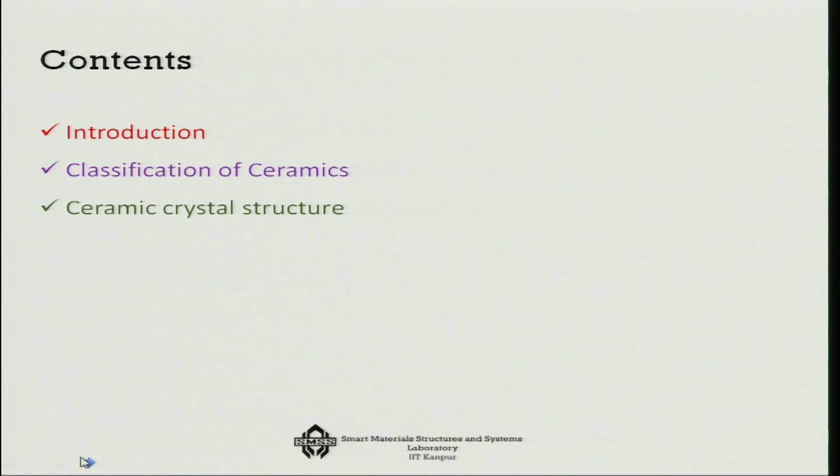Now the name ceramics, as I told you, this whole thing is very ancient in nature. The name itself has a very ancient root, because it is derived from a Greek term, keramikos, which means burned stuff. In earlier days, when we talked about something like ceramics, it was always associated with pottery. So clay is the earliest known ceramic, used in pottery, and that's mostly alumina and silica type of material.

Now ceramic materials are, by root, actually inorganic crystalline materials - that's very important - which are made from compounds of one metal and a non-metal. So if it is a metal non-metal combination, then that type of ceramic generally has ionic bonds, and if it is a non-metal combination, then it generally has covalent bonds.

Now glass is also sometimes uttered in the same way as ceramics, but glass by definition is not a ceramic, because ceramics have a distinct crystalline structure, but glass is amorphous. However, the mechanical properties of glass, even though it is amorphous, are very much similar to ceramic materials.

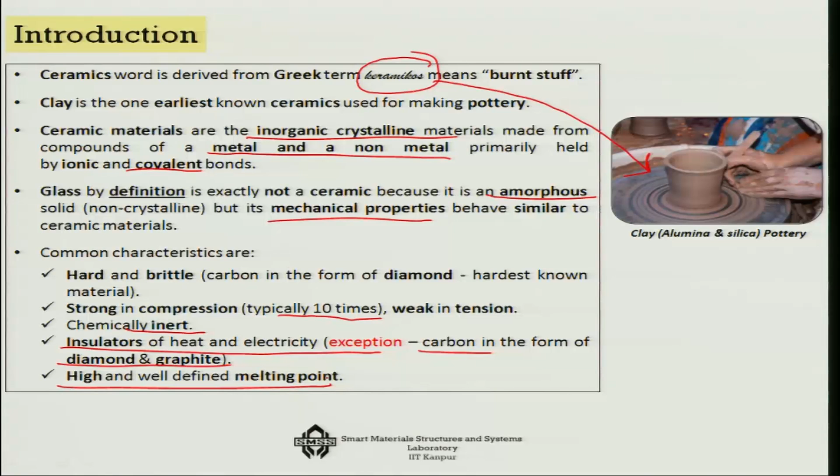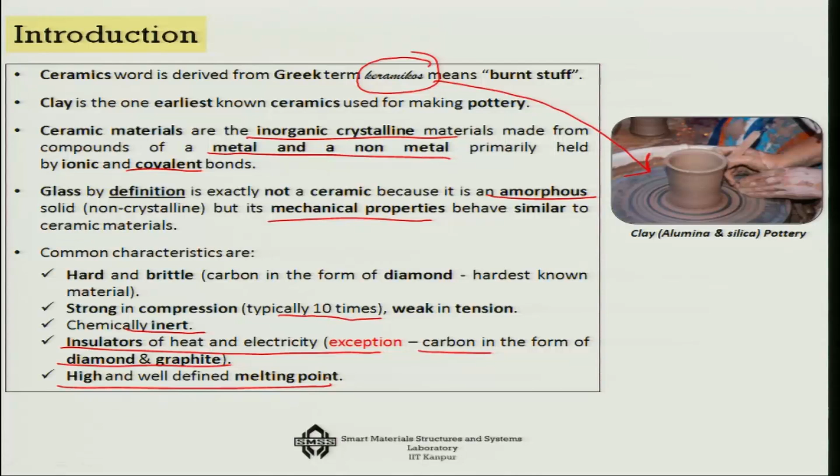In fact, that is why in many re-entry vehicles, like space shuttles and other things that come back from space and are subjected to very high temperature, you will see that invariably their surface is made of ceramic tiles, so that it can resist the high temperature.

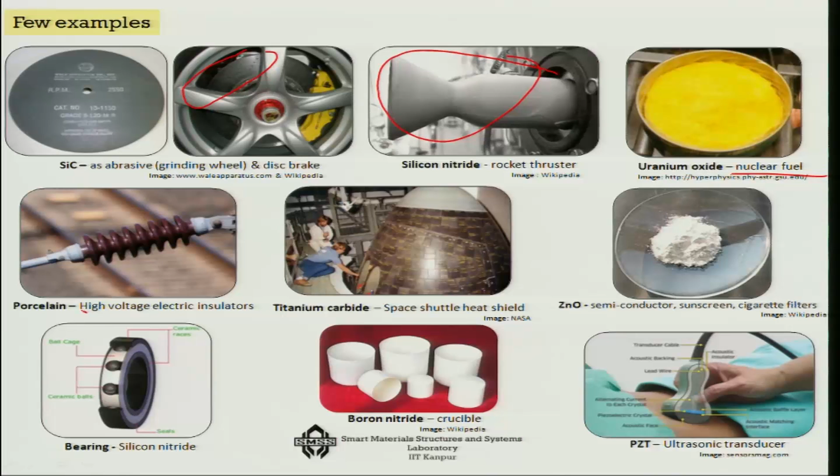There are many examples. For example, silicon carbide, which is used as abrasive grinding wheels, or you will see it even in disc brakes. Then silicon nitride, used in rocket thrusters; uranium oxide, used in nuclear fuels; porcelain, very standard in high voltage electric insulators; titanium carbide, used in space shuttle heat shields; zinc oxide as a semiconductor, in sunscreen, or sometimes even in cigarette filters.

Bearings, you will get silicon nitride again, boron nitride in crucibles, and of course lead zirconate titanate, one of the smart materials which is heavily used in ultrasonic transducers. So in all ultrasonic tests, the crystal used inside to generate high frequency vibration is nothing but a piezoelectric material, which is a ceramic material.

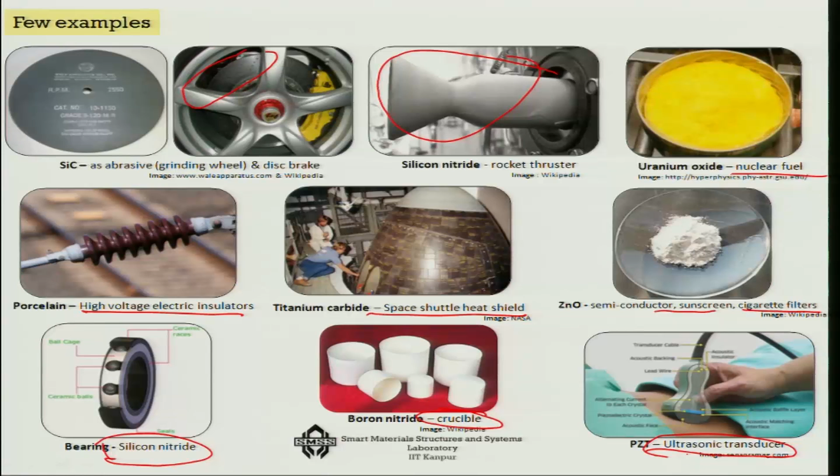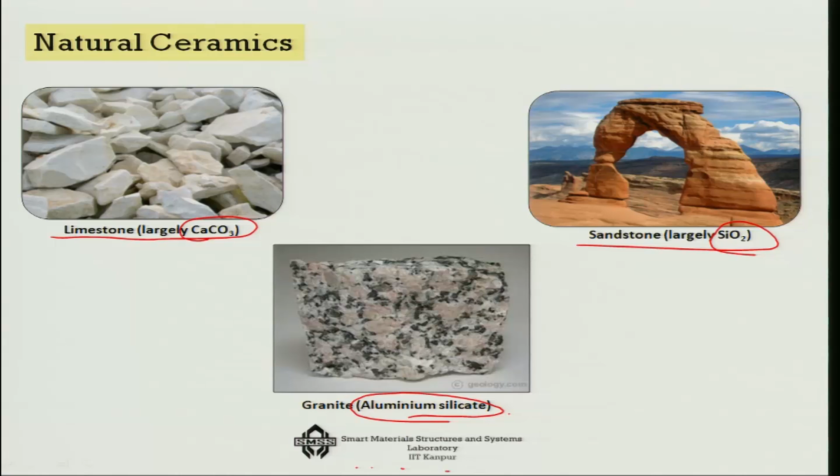Now let us go to different types of ceramics. First of all are the natural ceramics, for example limestone, which is mostly calcium carbonate; sandstone, which is largely silicon dioxide; or granite, which is like aluminum silicate. So there is a very good reserve of ceramic materials in the form of rocks and stones.

Next is abrasives. Typical examples are silicon carbide, tungsten carbide, alumina (also known as corundum), and silica sand.

They are used to grind or cut away other relatively softer materials, and because they are used for cutting away or sharpening other softer materials, they have very high hardness and wear resistance. They are used in the form of, for example, bonded to a grinding wheel by glassy ceramic or an organic resin, something like a tungsten carbide wheel, or abrasive powders coated on paper or cloth, something like sandpapers.

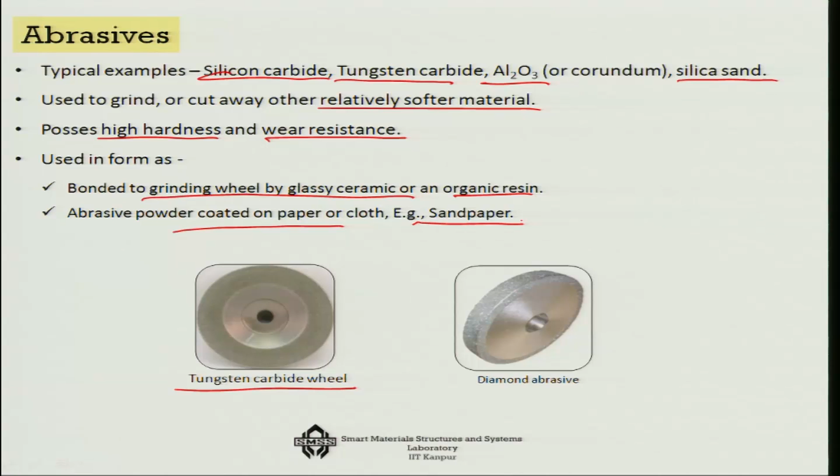So, in the form of abrasives, they have very large applications for sharpening, shaping, or smoothing the texture of various types of products. Next, one of the biggest applications of ceramic materials is in refractories. For example, they are used in furnaces operating around 1500 degrees centigrade.

If you look at the brick kilns where bricks are prepared, the kiln itself is made of refractory grade ceramic materials. As I told you, they can withstand very high temperature without melting, and they remain unreactive and inert under severe environments. That is why, in addition to not melting, that inertness makes them suitable for many processes where corrosive chemical environments are generated.

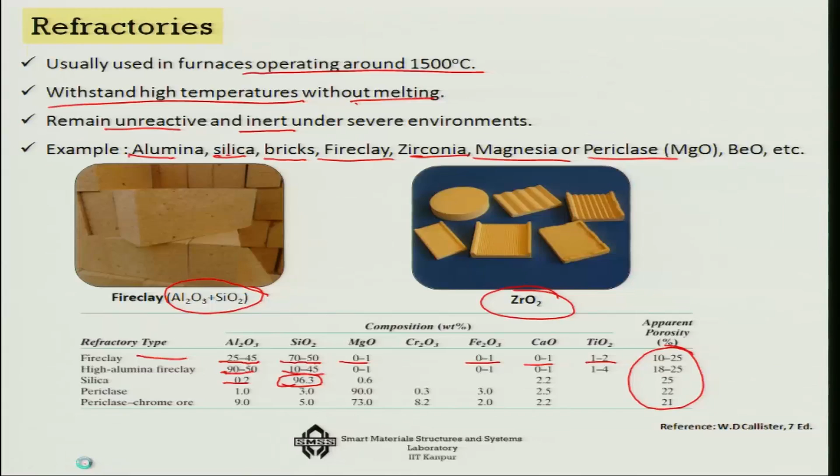The other important thing is that the porosity is generally about 20 to 25% in this type of material. So, they are porous, and that can reduce the weight of the system at times. In fact, one of the ceramics that I have shown you earlier is xerogels or aerogels. They are very light because they are highly porous. So this is also good for various applications like thermal insulation.

Ceramics as composites. When we discuss composites, we will discuss ceramics in terms of fibers and also ceramics in terms of matrices. In general, ceramics are very important elements of making composites. You can combine them with metals or polymers to make the composite, to take advantage of individual component properties. For example, as fibers, ceramics have quite high modulus of elasticity, so you can take advantage of it.

And you also know that on a macro scale ceramics are generally very brittle, but if you draw them into fiber form, they are not so brittle because they are less susceptible to cracks, and hence they are very good reinforcement components in composites. In ceramic composites, fiberglass is one of the important ones, a composite of glass and polymer used for high performance structures.

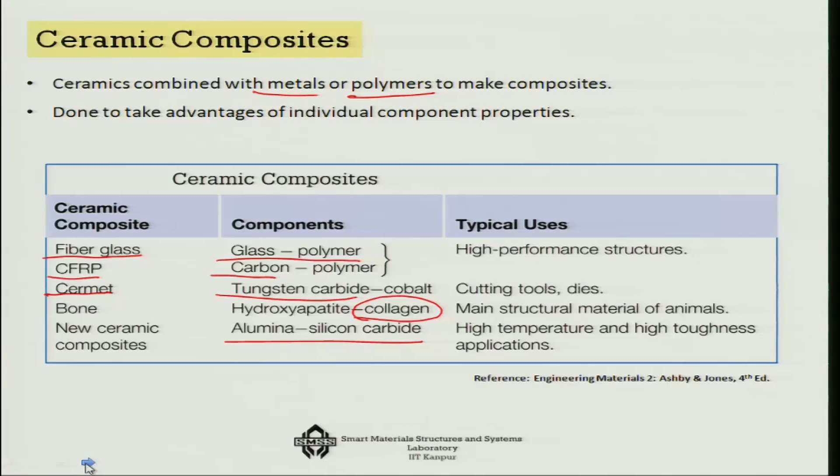Other vast examples of ceramics are cement and concrete, used as construction materials. Cement is basically a combination of lime, silica and alumina, and it sets when mixed with water. Concrete is a mixture of sand and stones, aggregates held together by the cement. In that sense the stones work like particle reinforcement on a macro scale, a kind of similarity to composites.

So they work like particle reinforcement, and the cement, the ceramic part, is like the matrix in the whole system. So cement and concrete are another very good example of ceramics.

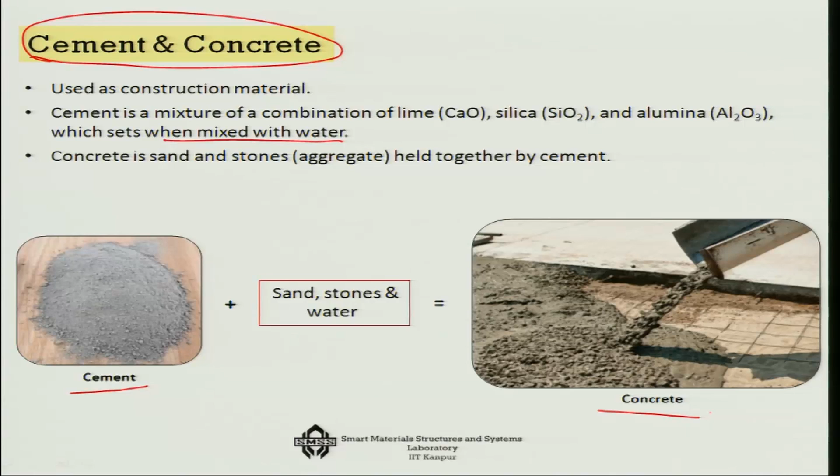Now there are certain high performance ceramics which have a high resistance to fracture, temperature stability, high load carrying and wear resistant properties. For example, the dense alumina, which is used in cutting tools, dies, wear resistance. Then silicon carbide or silicon nitride is used for surface bearings, medical implants. There is another product which is known as sialons.

It is a complex composite of silicon, aluminum, oxygen and nitrogen, and sialons are also used in various applications in engineering like engine and turbine parts. Then there is the cubic zirconia, which is used once again for making cutting tools, dies and armors at times. So these are high performance ceramics.

The high performance comes because it has to undergo very complex chemical processes, unlike your cements and concretes. In one of the examples I will show you that the minerals are first excavated and then they are very highly filtered, sieved, and only the pure ceramic materials are chosen, and then there is a processing, and then you make the green sample, finally you burn them and you get the sample which you use.

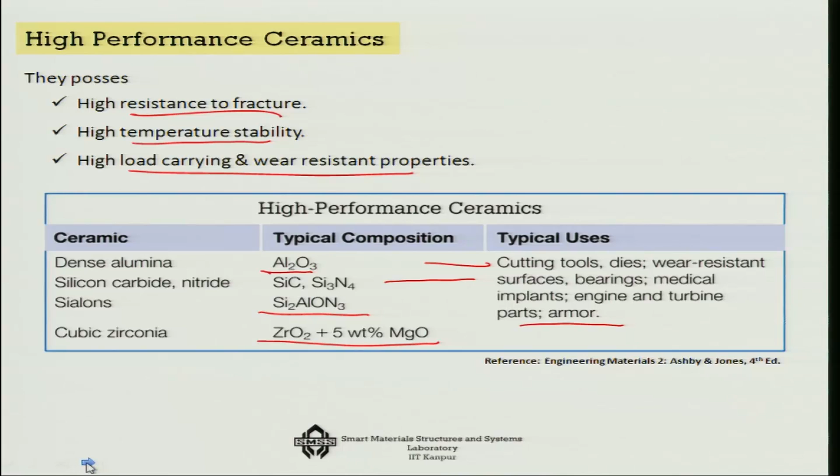So, all these processes make it very expensive, as well as yield very high performance parameters to the ceramics. Now, glasses, as we have said, have some very common properties with ceramics, although they do not have a regular crystal structure, but they are amorphous in nature. Now, the glasses are actually non-crystalline silicates, maybe from calcium oxide, sodium oxide, potassium, aluminum oxide, etc.

But instead of holding it, if you start to cool it, in fact the faster the better, that means you are simply freezing the fluid. The molecules are moving all around, and that mobility is suddenly frozen, and that will give you the amorphous glassy structure, and that kind of glassy structure below Tg gives you a very brittle structure, mostly because there will be a lot of micro cracks in that super cooling condition.

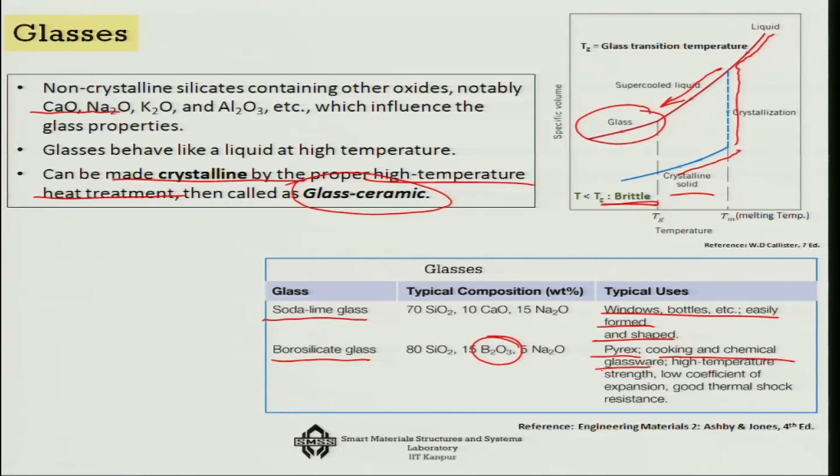Now, these glassy systems can also be made crystalline by a high temperature heat treatment. So, once again you take it to a very high temperature and then hold it and get a crystalline form. This is commonly known as glass ceramic. There are two very common types of glasses: soda lime glass, which is used in windows, bottles, and easily formed and shaped. The other one, which is more expensive, is borosilicate glass, which along with the silica has boron oxides, and this is used for pyrex, cooking and chemical glassware, high temperature strength, low coefficient of expansion, and good thermal shock resistance.

This was actually discovered by the Curies, quite a century before, but now it has a lot of industrial applications because of the piezoelectric effect, which is very prominent. We call it the giant piezoelectric effect in some of these ceramic materials, for example, barium titanate, lead titanate or lead zirconate titanate or potassium niobate. So, some of the materials where this effect is very predominant.

So, there are two types of piezoelectric effects in these ceramics. One is the direct effect, which is used for sensor making, like in many of your cameras you will see it, that if there is a stress, then an electric voltage will be generated in the system. And the other is the reverse effect.

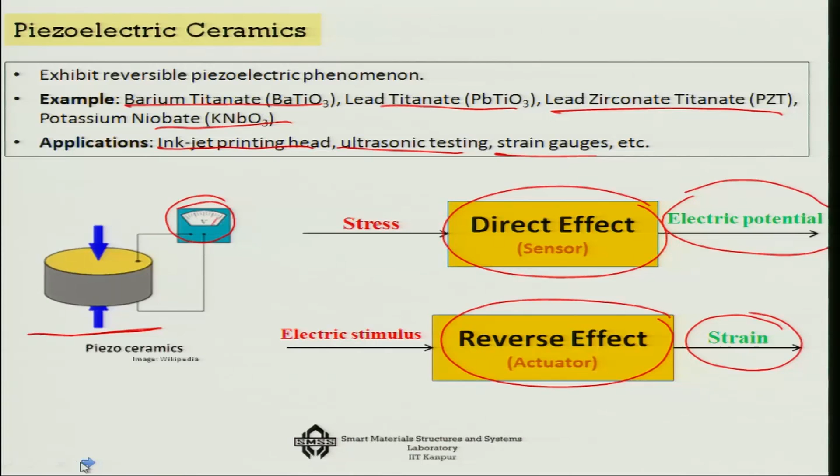That means you apply the electric field and you are going to get strain out of it. The applications are enormous. Some of them are inkjet printing heads, ultrasonic testing, strain gauges, various types of sensors, and various types of actuators developed using these piezoelectric ceramics. But there are some very special grades of ceramics.

Now we will discuss the bonding and crystal structure of ceramics. As I told you, bonding in ceramics can be either ionic or covalent, or can be both actually. So depending on the typical compound, you can find out what is the percentage of ionic character. So if you know the elements used in the ceramics, Xa and Xb, and if you know the electronegativity, then you can find out the percentage of the ionic character.

For example, calcium and fluorine, you know their electronegativity, so you can find out that it will be 89% ionic in nature. On the other hand, silicon carbide is mostly covalent bond predominant, so it is about 12% ionic character. So the electronegativity of the elements that make these ceramic compounds basically determines whether it is going to be predominantly ionic bonding or covalent bonding.

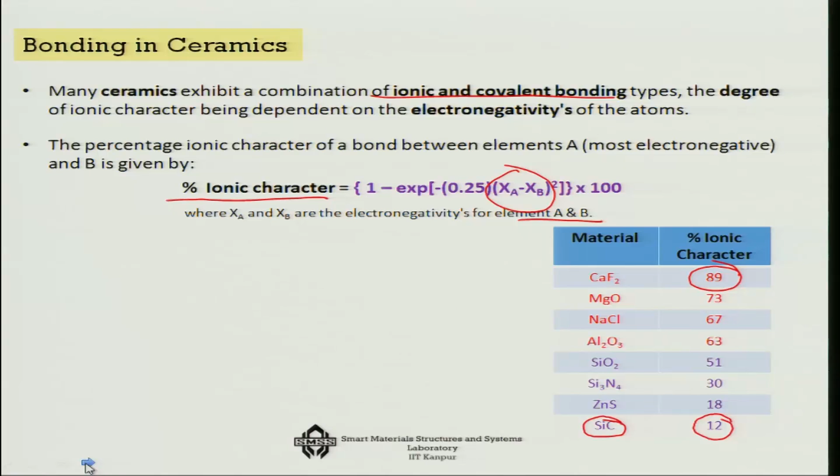If they are very far apart, that means if Xa minus Xb is very high in terms of electronegativity, then it will be predominantly ionic. Otherwise, it will be the other way around, that is covalent bond. There are very popular examples of ionic ceramics. The common salt that you take is an ionic ceramic, sodium chloride. Then of course magnesium oxide, zirconia, alumina, these are all ionic ceramics.

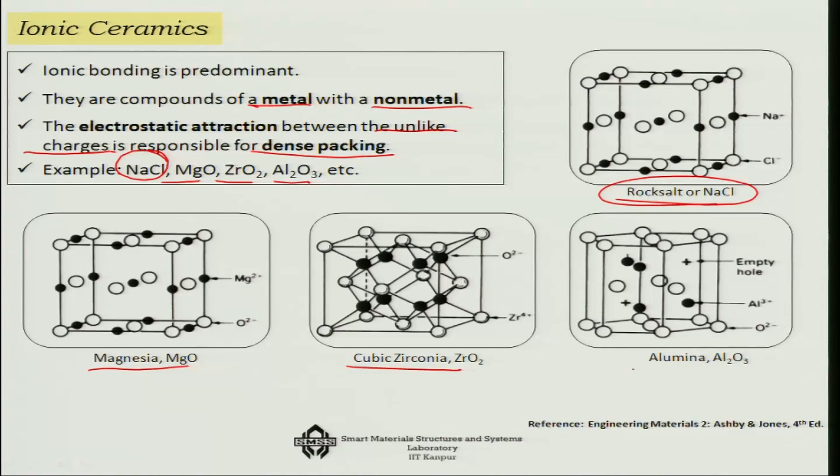They have a metal non-metal combination, and that is what makes these bonds ionic bonding. And because there is electrostatic attraction between the unlike charges, they generally have very dense packing, so the density could be very high. This is the structure of common salt, rock salt, sodium chloride, as you can see. Then magnesia, cubic zirconia, which is a little more complicated, and alumina. So that is about the ionic ceramics.

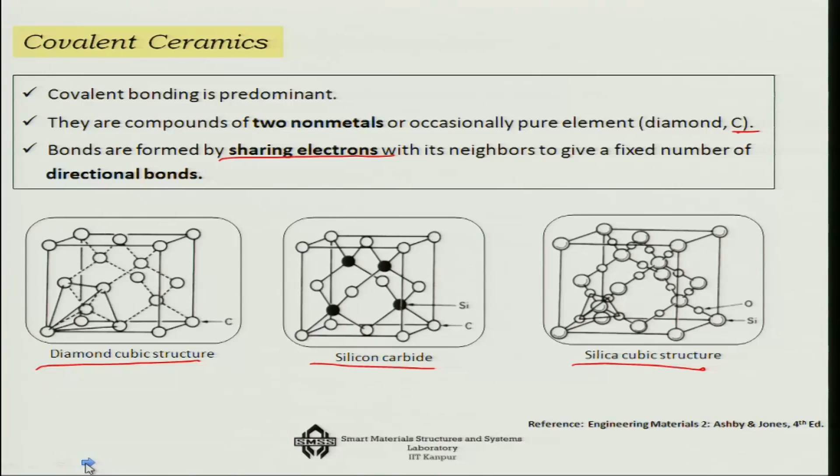Now if it is two non-metals, for example carbon and silicon, then it may create covalent ceramics. Here the bonds are formed by sharing electrons with neighbors to give a fixed number of directional bonds, because covalent bonds are directional in nature. For example diamond, silicon carbide, or silica cubic structure. Because the bonds are directional, these materials, even though they are strong, will be anisotropic, because along the direction of the bond you expect more stiffness than across the bonds.

Now some ceramic crystal structures are actually more stable than others. Why? If you look at the ionic bonding based ceramic structures, you have cations and anions, and generally the cations are smaller than the anions, like there is a cation here and all around there are these anions. So because this fellow is in the middle, there are various ways you can get a three dimensional structure, but the most stable will be if they are in touch with each other.

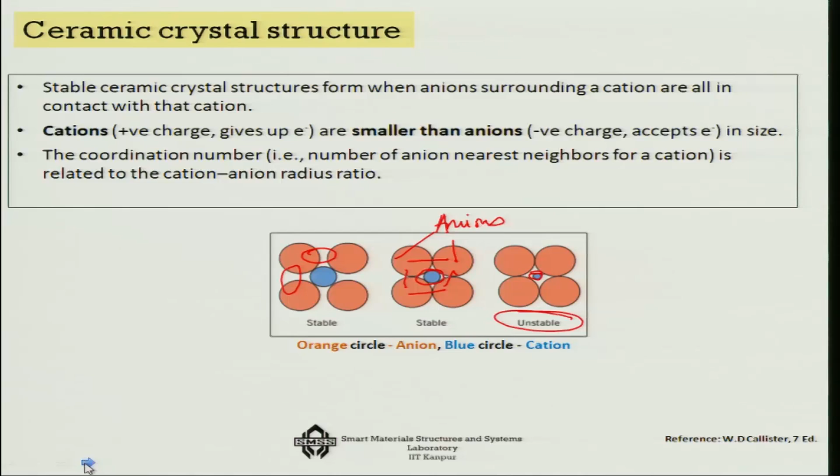If not, for example in this case they are not in touch with each other, as you can see in these regions, that may not give stability, and definitely if the anion is not touching the cation, then there will be an unstable situation. So let us look at it with many more variations.

For example, from the coordination number point of view, if there is a linear structure, then we get a coordination number of 2 of anion cation. If it is a planar equilateral triangle, you get a slightly higher coordination number, you get a better packing. If it is a tetrahedron, you can see all 4 of them and the ion is sitting inside, you get an even better coordination number.

Octahedron 6, or cubic, you get the maximum of about 8. So that is how the packing changes, and depending on various types of cation anion combinations, you get various types of packing systems. It can go as high as 12 in fact. We have shown here up to 8.

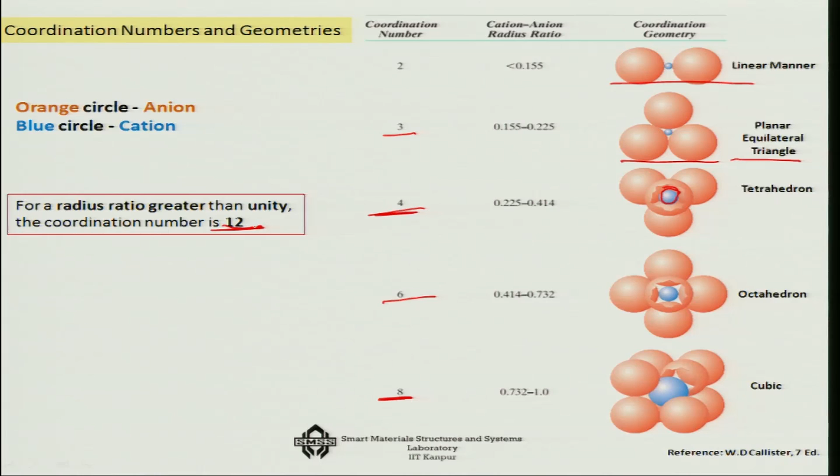The common crystal structure in ceramics is actually the AX type of crystal structure, where there are equal numbers of cations and anions, often referred to as AX compounds, where A denotes the cation and X is the anion. For example, zinc sulfide, equal number. The coordination number in this case is 4. All ions are tetrahedrally coordinated. There can be other examples like silicon carbide or zinc telluride. So, these are similar to zinc sulfide in terms of AX compounds.

Another type of AX compound is sodium chloride, rock salt, and here the coordination number is higher, it is about 6. There are other examples of this type of rock salt structure like magnesium oxide, iron oxide, etc. Then cesium chloride is the third type of system, which has even higher coordination number among the AX type of structures, close to 8. So, this is the highest coordination number in the AX structure.

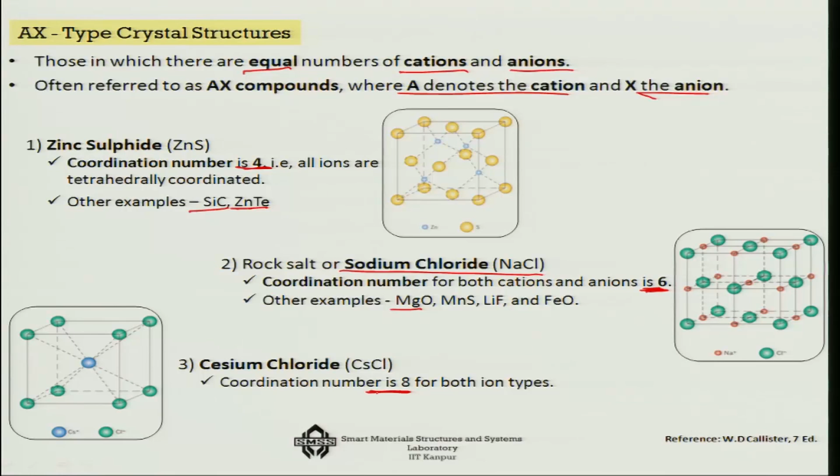Now, the other possibility is actually the AmXp type. That means you do not have equal numbers of cations and anions, you have unequal numbers of them. For example, calcium fluoride, zirconia, thoria, etc. Many of these radioactive materials belong to this group, the AmXp group.

And the third type, which is even more complicated, is actually the AmBnXp group, where you get more than one type of cation. Like in this case, you get barium and titanium, 2 cations, and oxygen as 1 anion. I told you earlier that this is also known as perovskite, named after a Russian geologist, and many piezoelectric materials actually show this type of 2 cation system, AmBnXp type of system.

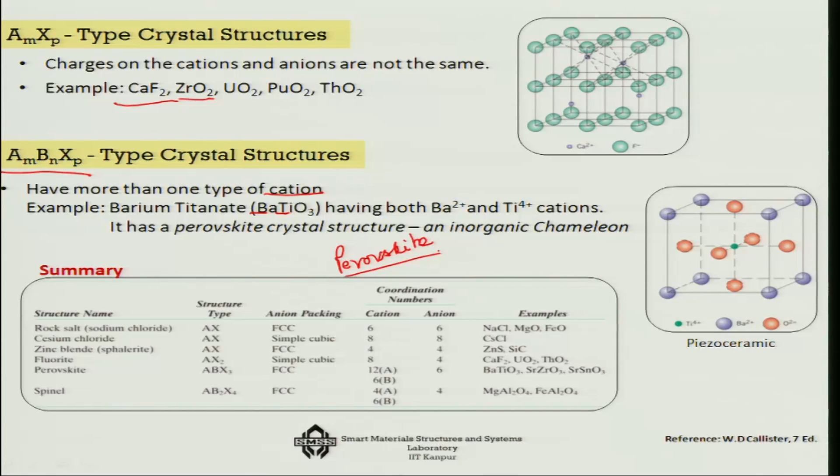Now, how do I use this to compute theoretically the density of a ceramic compound? The information that we will require is, first of all, the number of ions in the chemical formula. I will explain soon with the help of an example. Then the sum of the atomic weights of all cations, the sum of the atomic weights of all anions, unit cell volume, and Avogadro's number.

So, let us look into this particular example: can we find out the theoretical density of sodium chloride, rock salt? What is known to us? What is the atomic weight of sodium? That is 22.99 gram per mole. What is the atomic radius of sodium? That is also known to us, about 0.102 nanometer, 0.102 × 10^-7 centimeter, whatever way you put it.

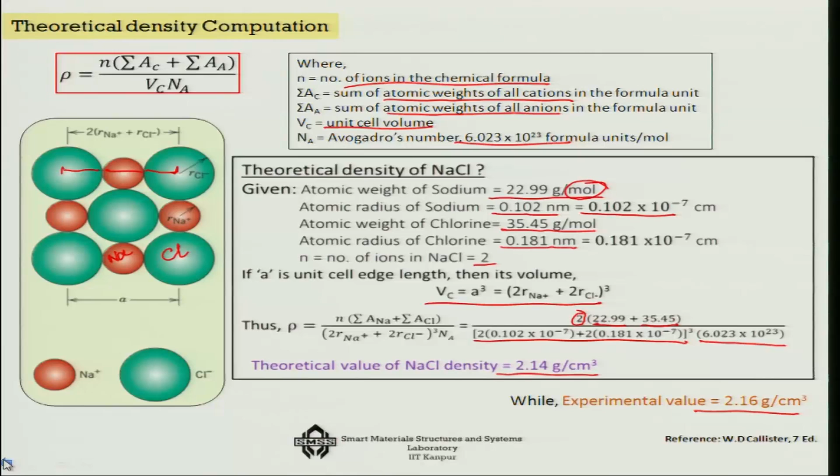So this is where we will put an end, and in the next lecture we are going to talk about the mechanical behavior of ceramics. We are going to talk about its failure and processing of various types of ceramic materials.